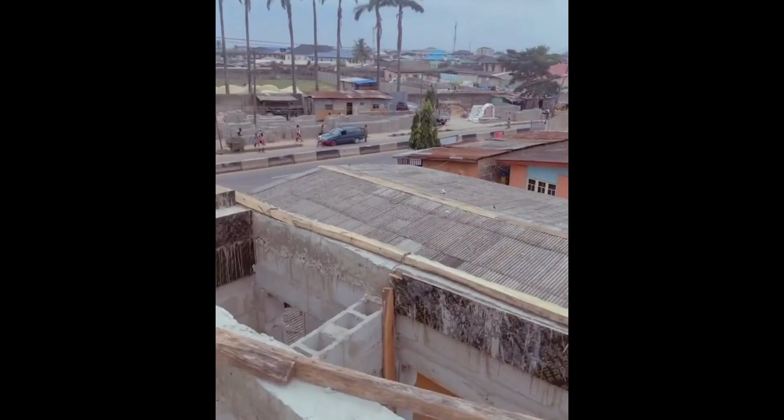And then there is me, with nothing but a safety vest and a hard hat. What's my job? I am an architect. And how do I find myself amongst the list of awesome beings with freakishly cool powers? It all started when I decided to be an architect.

Wait a minute! Who are you? I keep asking myself the same question every day. Am I the son of God? A skater? An artist? A singer? A chef? A dancer? Or an architect? Turns out, I am all of them.

Wait a minute! Who are you? To answer this question, we need to go back to the roots, the motherland.

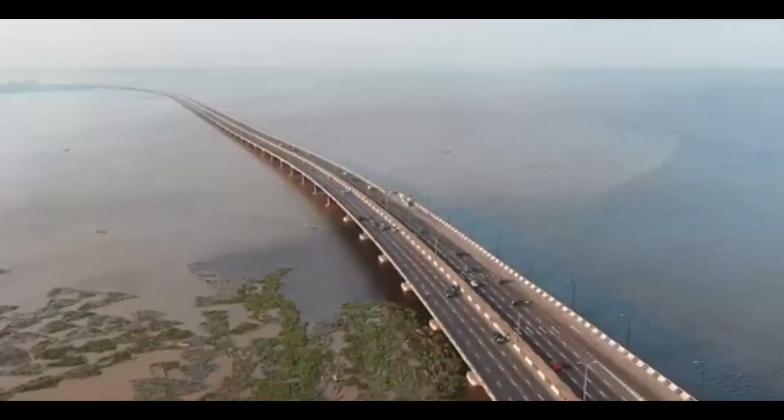This is the city of Lagos, my city, home of almost 20 million people. I was born in this part of West Africa. Lagos is a beautiful place, filled with beautiful people. I have grinded the streets of Lagos since my childhood. Lagos is filled with beautiful architecture, but nothing makes Lagos more beautiful than the people that live in it.

Lagos is an intertribal hub. It's a place where anyone can come and find expression. There is a popular saying that goes this way: if you can survive in Lagos, you can survive anywhere in the world.

These days deserve celebration. No hesitation, no reservation. Go for the big leagues, no relegation. Let's celebrate life, kick back and take five, and give thanks to the source that create life. To see a sunset or see a sunrise, and see my son born with these same eyes. To see my son smile bright in every grey sky. He's growing so fast, that's why.

Ever wonder what the services of an architect is, or what my job is? Well, it's not just drawing buildings, but we also save clients costly money decision making in their building projects. The services of an architect can be hired at any point and every stage of a construction project, be it constructing a house from initial concept design to renovation of existing construction, or even getting an architect involved if there have been bad decisions using an unskilled or incompetent professional during the initial stage of the construction project.

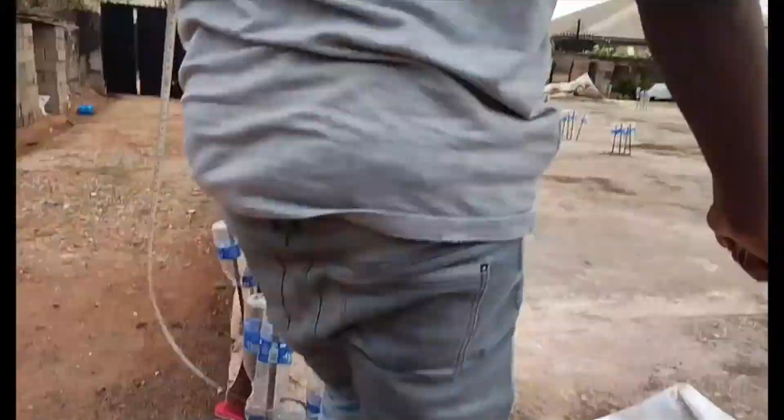After seeing how many building regulation codes have been violated, I was like, no, God! No, God, please, no! No! After seeing what's on ground, it's time for me to break out my surgical instruments and revive this building project.

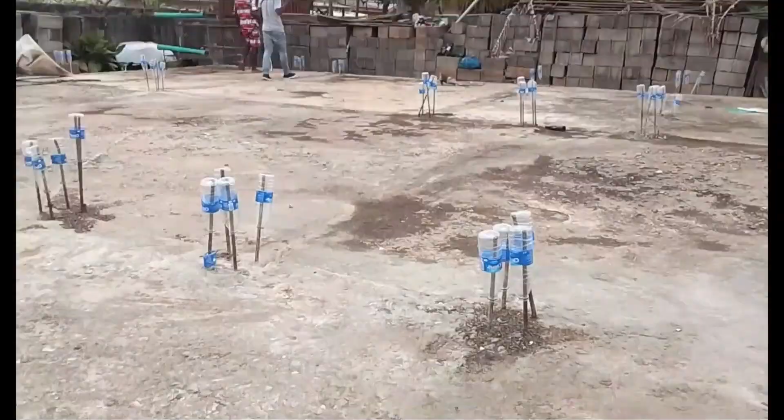Firstly, I had to see the setback from the actual fence to the building itself. So I will be taking measurements of the building. The initial project was stated to have 2 floors, but after whatever they did on site has been done, this was what the contractor did. Why are you running? Why are you running?

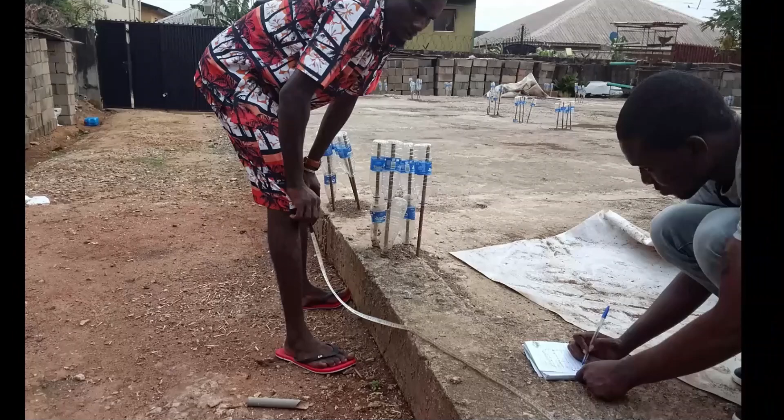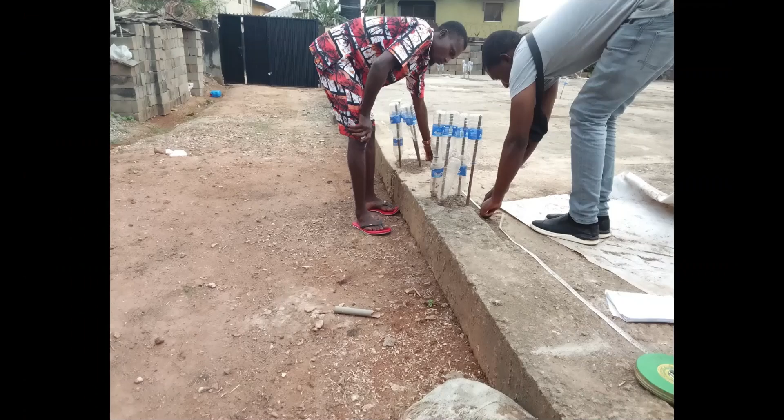There were several limitations to this project I embarked on. Firstly, because the foundation has been laid and there is little or nothing that can be done to change the placement of the column and where the wall will pass through on the ground floor, I had to make use of as much existing column on the project as possible, because that's what will be carrying the load of the building. And I've taken an initial measurement of the existing column on the floor slab, which will be used to design the new proposed building I intend to show the client.

As agreed with the structural engineer, from where I am standing, I'll be taking out the foundation cut from that point, so there'll be enough setback, and the remaining part used as rubble and taken out, so there's enough setback from the building to the fence. The building will start from that point where I'm standing now.

I'll be taking measurements of the entire building site with relation to the existing foundation of the existing building, to create a life-size scale model when working on the design.

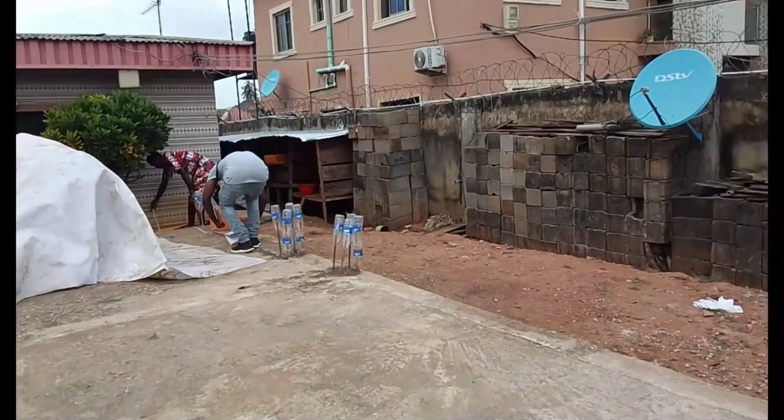It is essential to plan the usability of the space so I can understand how the building will interact with its occupants when at full capacity or when it is used.

The client is open to whatever is achievable with this space, because he intends to use it for rentage after construction. I will also be planning the building in such a way that I'll be providing more space, or providing setback for the existing building that is on site.

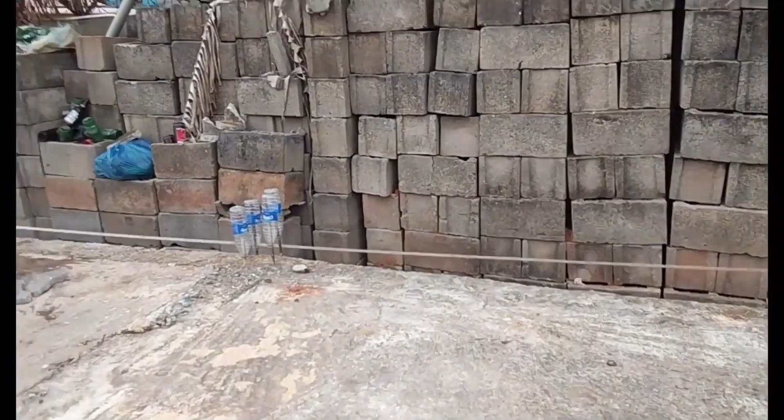After taking the entire area of the building end to end, it is time to return to the office and sit on the drafting board and analyze this project. But to be honest, I've had my fair share of the drafting board during my undergraduate level. It's time to move on to the good stuff: Revit. Feels good.

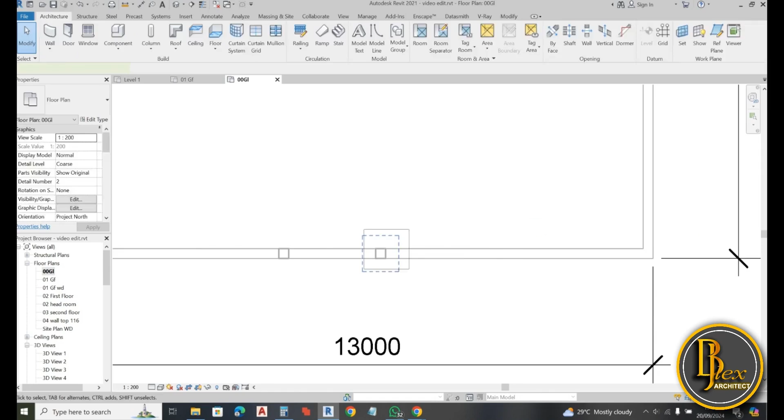Since I've taken an initial measurement of the entire area of the building, I'll first draw that down. Then I would determine the placement of the columns according to what was measured on site, so I would know where each column will be placed.

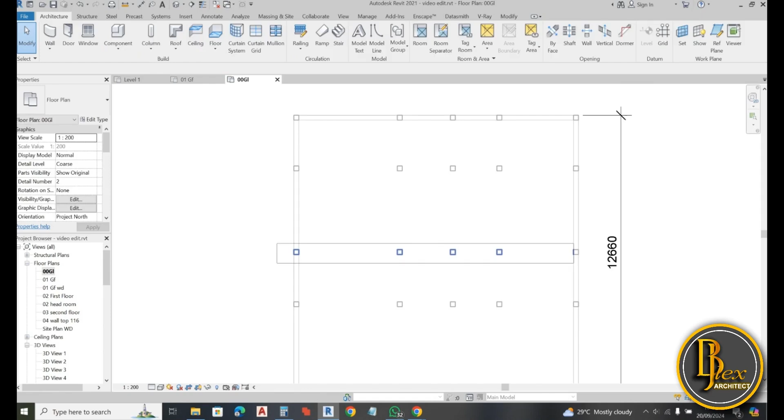After determining the placement of each column on the floor plan, it is time to start drawing walls and connecting the columns to see how best the space can be planned.

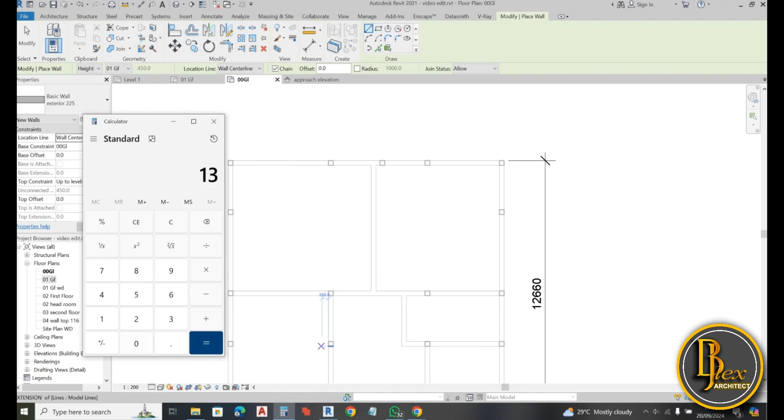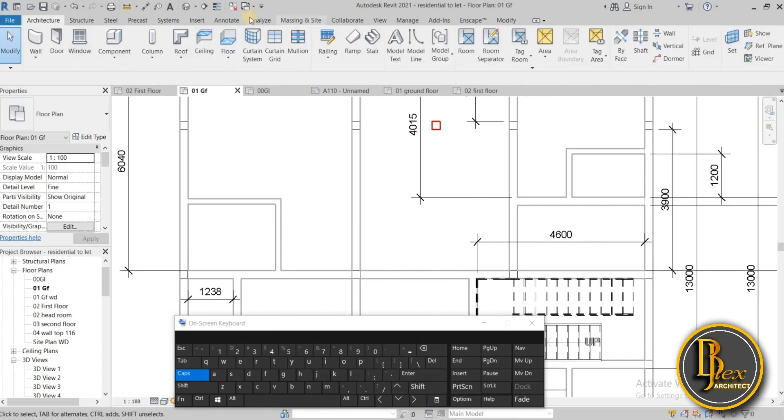There was this particular column positioned at a very odd place on the slab that made me plan carefully. At the end of the day, I thought of having a one-bedroom flat behind the building, which is 2 units, then 2-bedroom flats in front of the building, 1 unit. The stair hall has taken in on the space in front, so there's limited space there, but I still have to find a way to make it work.

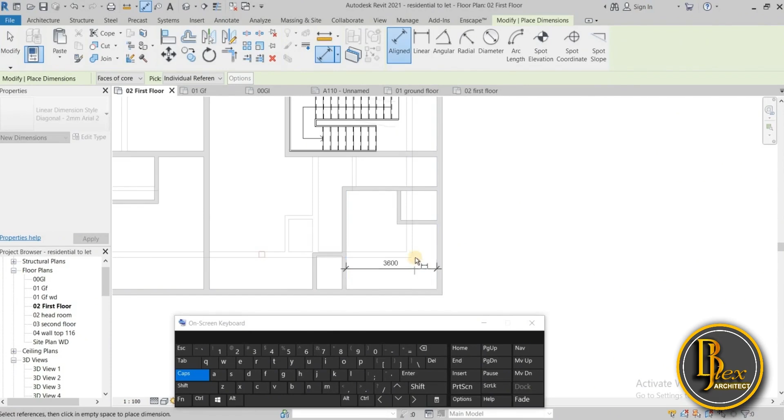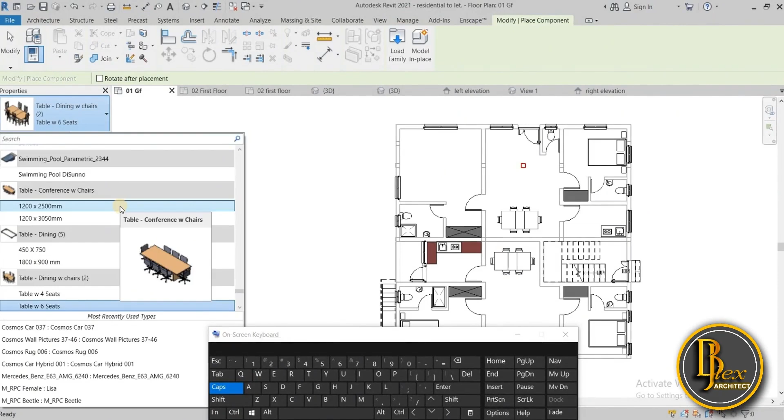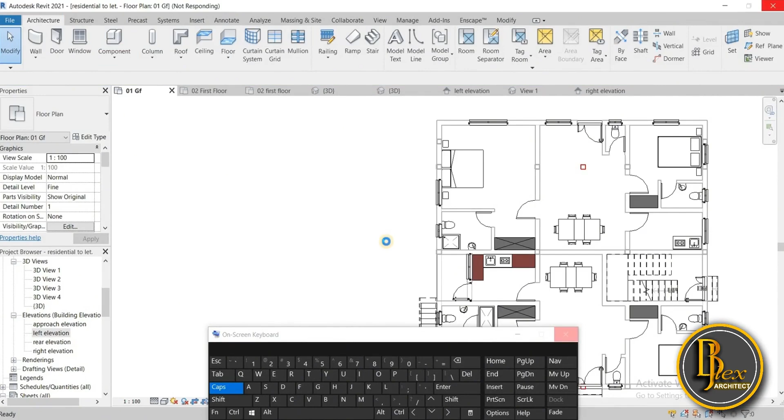So I resolved that the column highlighted in red would be taken off. The column isn't useful being in that position and it isn't bearing any load at all, so it will be removed. Then the initial one-bedroom plan, which I was trying to make work, wasn't working, so I changed it to a 2-bedroom apartment.

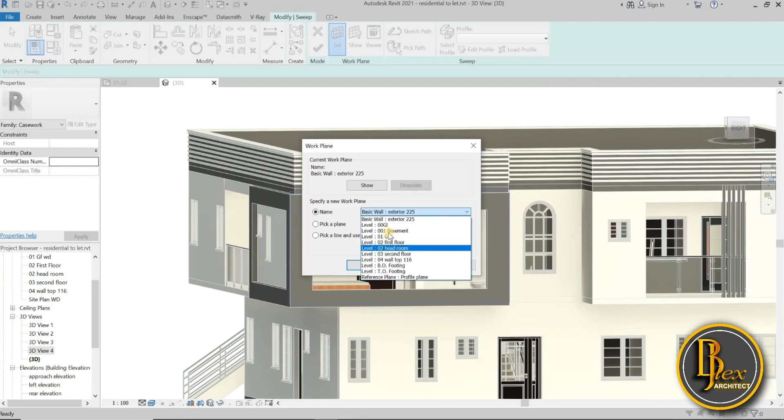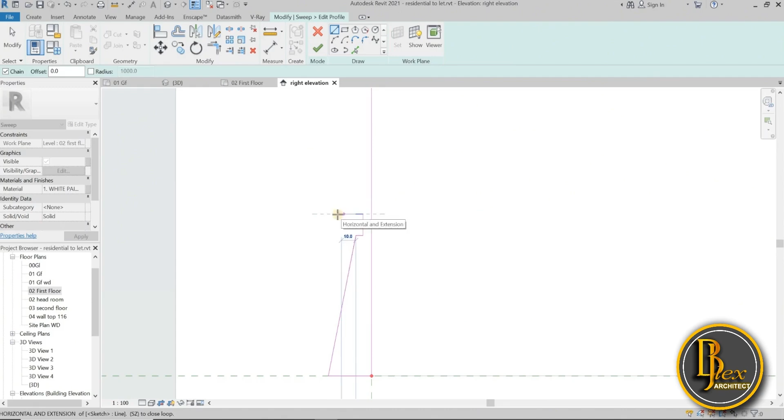For the facade, I intend to go with a popular European side wall siding on the east part of the building. This pattern is very popular amongst people staying in London, but I'll be putting that form of architecture in this design.

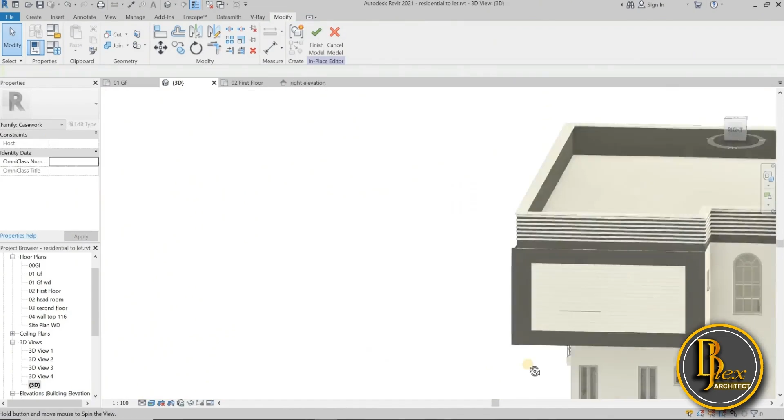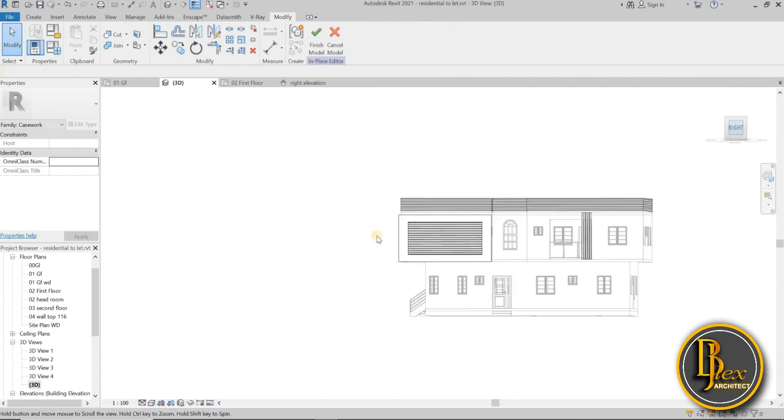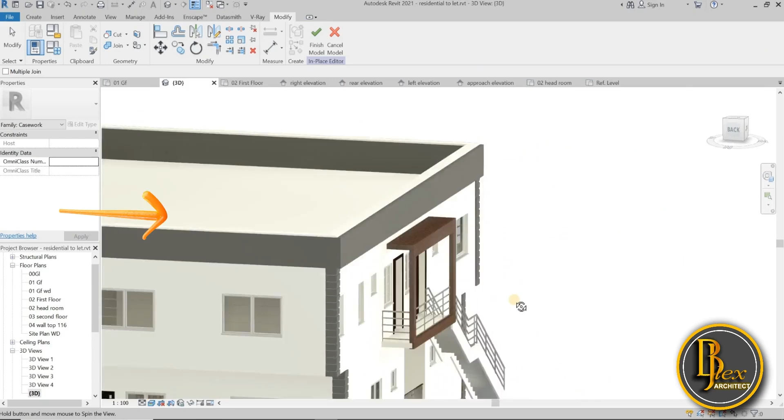After doing the siding, I realized the bump profile I kept on top wasn't working for me. Then I changed my mind and removed it, because to me more is less - less is more rather. If you do less, you have more. Having less makes your building beautiful, so I had to remove whatever I kept there before.

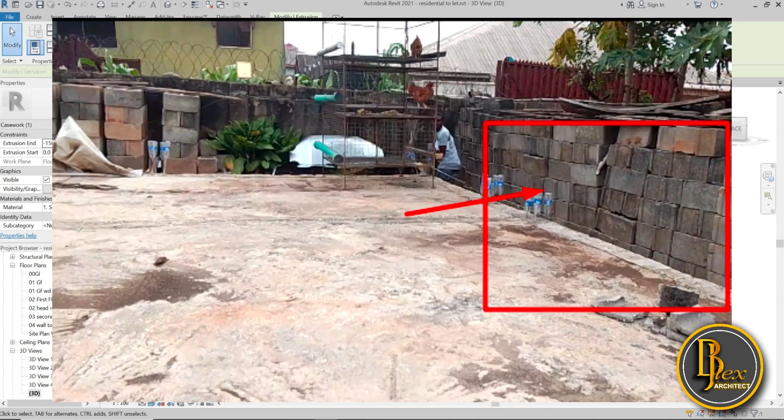Although there wasn't enough space on the west part of the building, it was still necessary to provide a service staircase one way or the other on that part. That part was measured to be about 1.35 meters, so I squeezed in a service staircase of about 750-ish, then a stringer of 100, making it 850 on both sides, for the people staying on the top floor in case of an emergency.

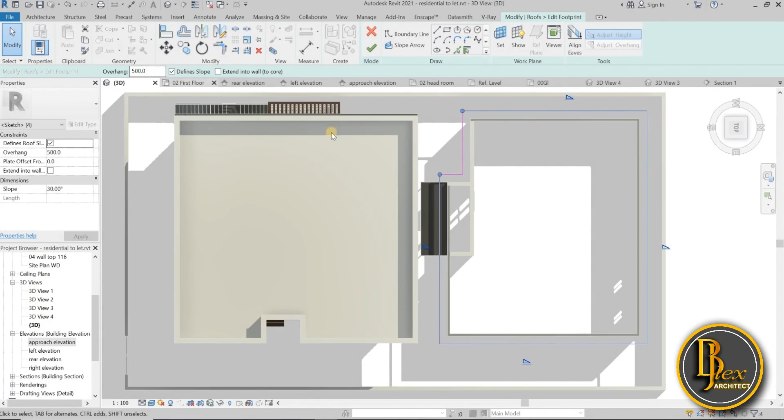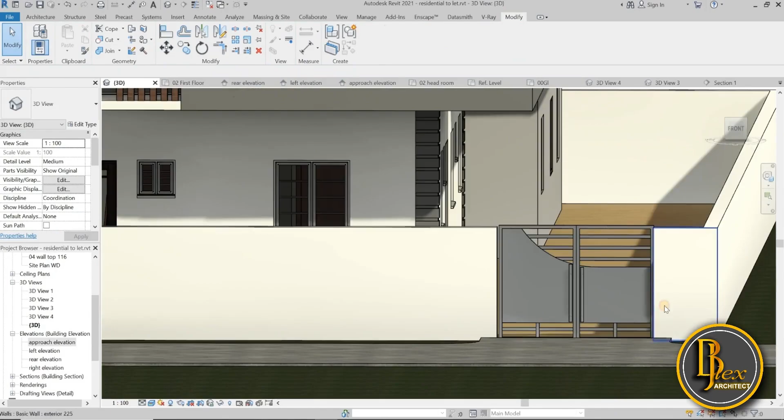I provided two feels for the building, a contemporary feel and a modern feel, for the client to choose from. The contemporary feel is just a flat roof with some contemporary bezels around the building, while the modern feel is the Dutch hip roof - a few moments later, which is what you're seeing right now.